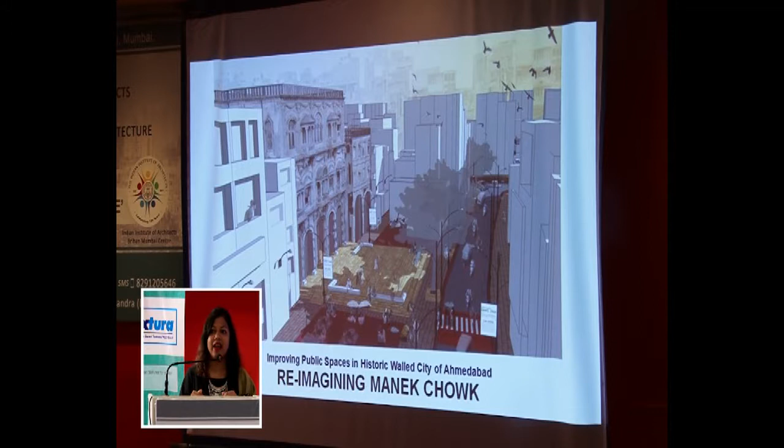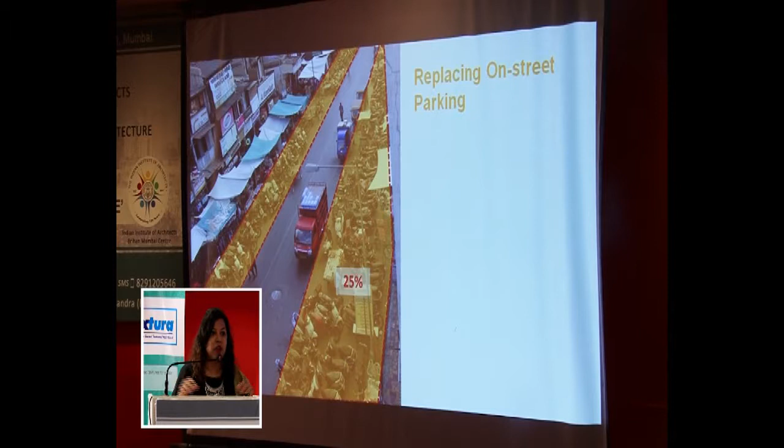For example, this is a typical street in the old city of Ahmedabad, where the biggest problem is parking. That takes away 25% of the land, which leaves absolutely no space for people to walk. So what happens? If you see all our guidelines and regulations, they are more towards parking. If there are more issues towards traffic, more congestion, what do we ask for? More roads and more parking. So what does parking do? It attracts more cars.

My entire issue was that we as citizens fail in asking things from the government. Government is always there to give what we want - we have elected them, they are our elected representatives, right? So the biggest problem lies in what we ask.

As an urban designer, what we did is we marked exactly how the space is being used. If you see, the car, for a driver, there was only 35% of the space for driving. And for the people, it was actually less than 2% of the area.

If I ask any of you, the major problem we face in Bombay is traffic, right? And what do we ask for if there is traffic? More flyovers. But let me make you understand - like tomorrow, most of us are fighting fatness, obesity. To solve obesity, do we solve it by wearing loose pants? As you grow, as you buy more loose pants, does it cure obesity? No, right?

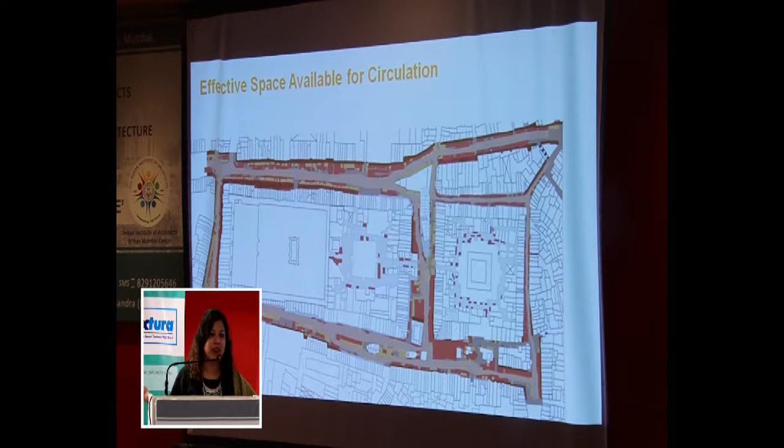Same thing - for more cars, we ask for more flyovers and we widen the roads. What does it do? It eats away the footpaths. So then where do those pedestrians walk? They walk on the carriageway. It creates more conflicts, and that is what creates traffic. So who has asked for those big roads? Pedestrians. So the thing is, what are we asking?

Why can't pedestrians ask for footpaths? Why can't pedestrians ask for better public transport? One of the most interesting numbers to give you - in Bombay right now, the two big projects we are talking about are the Trans-Harbour Link and the coastal roads. We are asking for better roads, better vehicular infrastructure, but do you know what percentage of vehicle owners are in Bombay? Any guesses? 50, 20, 45, 60?

The answer is only 8%. And do you know what percentage of pedestrians are in Bombay? We all are pedestrians because we all have to walk at least to our car. But have we all 100% come down and asked government for better footpaths? Our code states 1.8 meters as the minimum footpath.

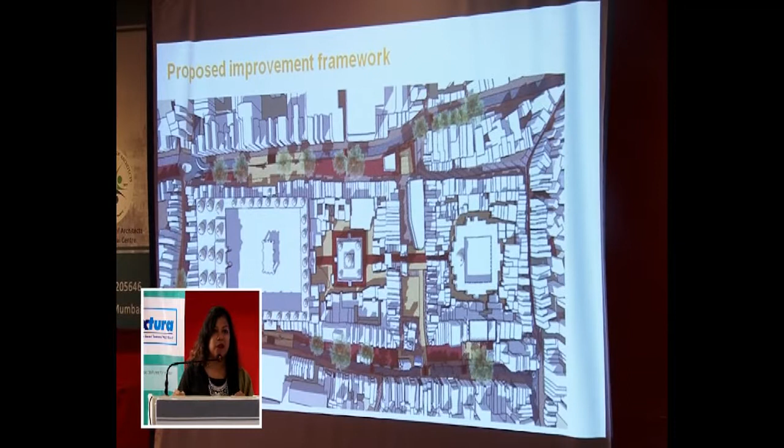For example, just to give an idea, you know how roads are widened? There is a PCU unit given to a car. Once you see the peak hour traffic, you divide it, you do certain arithmetic, and you come down to the width required - that's how the width is provided. Such things are not mandatory for a footpath. If that thing is done for a footpath, a vehicle can actually pass very smoothly on a carriageway by reducing the conflict areas. No one does that. That's how the entire design actually worked.

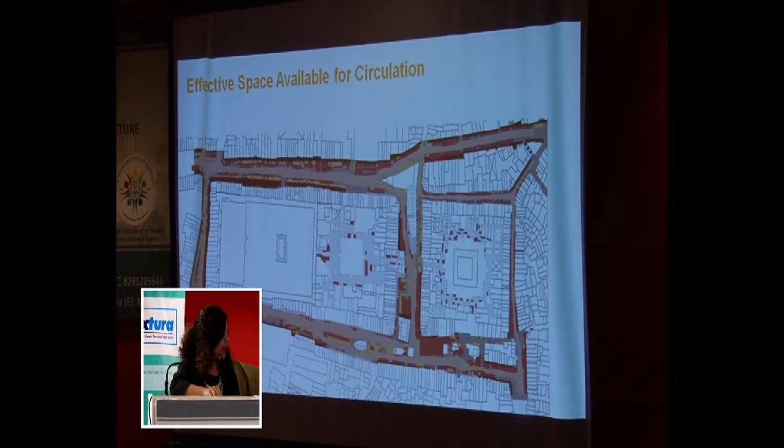So if you see, right now there is absolutely no pedestrian area, and the hatch in between is not working. It's okay, but you can figure out the hatch, right? So that's the only carriageway.

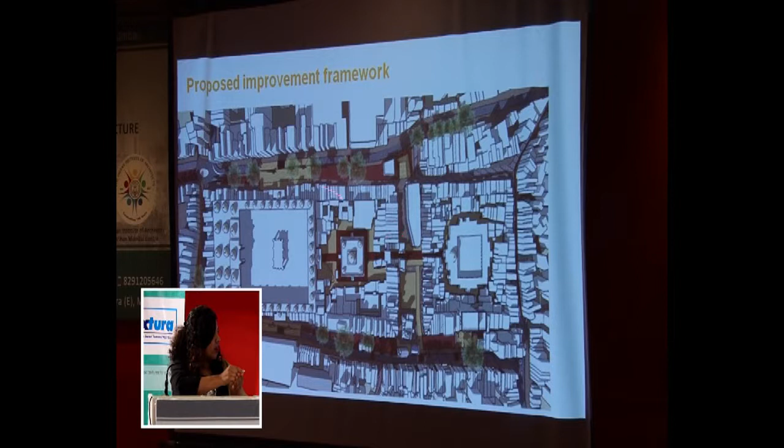Here, if you see that maroon part, we have only taken away the parking and reorganized the spaces for the vendors and pedestrians. So what happens? The conflict area decreases, therefore reducing congestion, and vehicles and pedestrians both coexist happily.

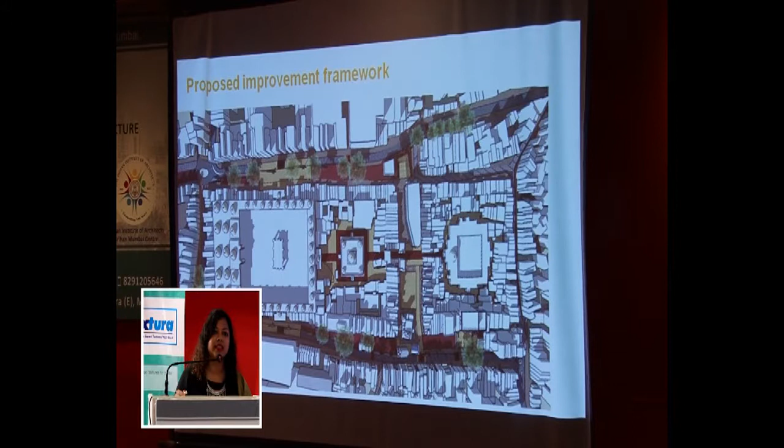We are saying, as Sulakshana ma'am was talking about, Gehl. Jan Gehl is one of the biggest proponents of saying a government is not supposed to provide you with parking.

When we as people buy an AC, do we ask for free electricity? No. So then if you buy a car, who has given you the right to ask for free parking? That's a luxury that the government is giving you at ₹5 per hour. So that doesn't strike, right?

So we have found derelict plots in the abutting zones that provide off-street parking for these vehicles, and also disincentivize parking norms in this area, to promote more pedestrians.

One thing we come across in designing these areas is this mentality of going by car, buying something, and going away. When we had the stakeholder conversations, the owners said, why will people come if there are no cars? So there would be a certain conflict for some months, maybe a year or two.

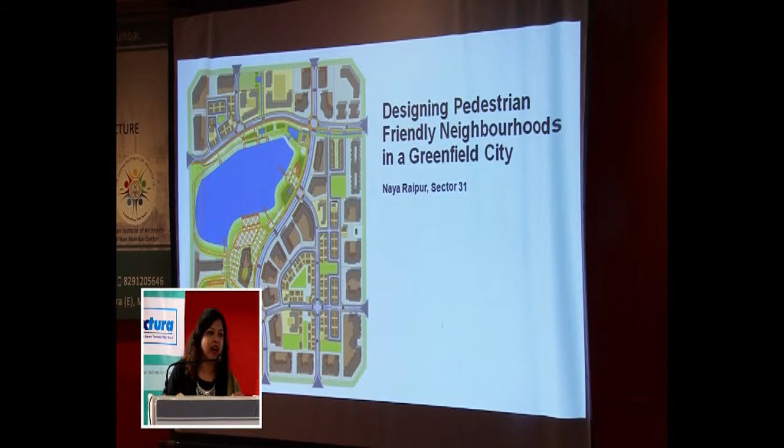The second project that I'll be showing you will be in a Greenfield area called Naya Raipur, the new capital of Chhattisgarh.

As you see, this is how I started my major work, working as an urban designer. This city looks like Mars. There is nothing around. This picture was taken in rainy season where you see some green, otherwise it's completely red.

Just a personal note - being a woman, when I joined WRI I was just 26. I don't know whether I'm happy or sad, but I'm the only person in my entire organization at a national level that they send to different cities every year to convince people. It's not a guy, there are no seniors, only me. There are men and women alike who like to stay in their own cities and work, and I understand that. But for me, they have always sent me elsewhere - anyone who knows me knows that this year I'm in Bombay, last year I was in Delhi, before that Ahmedabad, before that Chhattisgarh. So every year it's a new address for me.

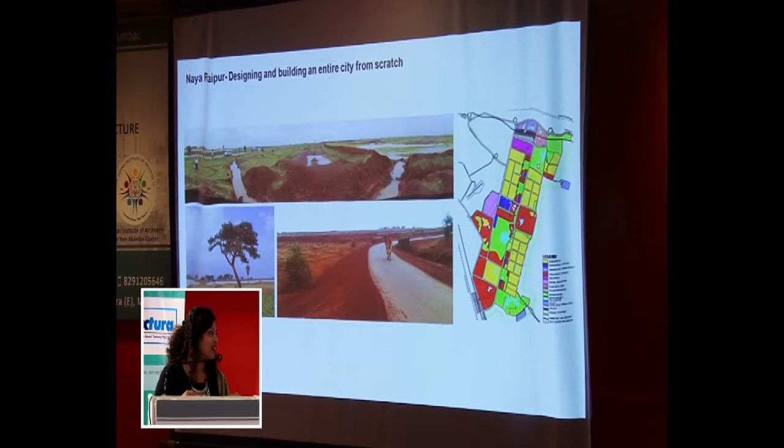It was something so weird - in a government office, everyone used to talk in Bhojpuri, and I was like, stop. It was very difficult for me to control my laughter because being from Bombay, our Hindi is horrible, and with that it was Bhojpuri Hindi. All the documents were in Bhojpuri Hindi and I had to understand them and then work. So it was a weird gamut for me to work in. That's how this project started.

Going ahead, with the same designs we said, these are the designs done by you, so let's build it. My job was to take those papers and convince every person. So something like I would go to a housing board and say, listen, we want safe cities, right?

Did you know the Nirbhaya incident could have been avoided if we had mixed uses at the edges? No one thinks about it, right? So we ourselves are to blame for such incidents. To help build a safe city, we instead design gated cities. Why? These are the gaps we are lacking - we know the concerns but don't know how to address them. Sometimes we know how to address them, but we take a step back saying, let me not make that compromise, let someone else make it. That's where the entire issue happens.

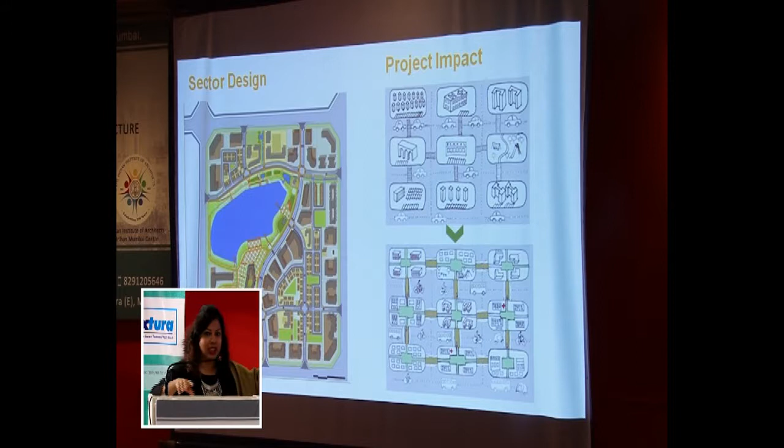So my 3 years were spent explaining that you can actually design one building with 3 different entrances, so people don't have to interact, but at least when they come down they all get the benefit of staying next to the lake and a high street. As an architect, we can find creative ways of helping different income groups and genders come together and stay. This project was about making people understand the scales of green spaces and how people can stay together.

One interesting thing while working with Naya Raipur, since it was my second government agency after MIDC and MMRDA, I was always told government agencies are corrupt, people don't listen, and you are a woman, 26 years old, what are you going to do? So when I entered on day one, they actually thought I was an intern, a trainee sent by an NGO, probably very poor, hiring trainees to get their work done. That's how I entered.

When I was talking about TOD, they were like, 'beti ye kya kar rahe ho, matlab rakho idhar.' At that level, I entered NRDA in January 2012, and when I left in May 2013, I was called Neha Madam, asked to see all 7 other sectors along with my own, and help the entire city become TOD. We designed only 31, but these other sectors also became TOD, and now the TOD concept will be held in all other sectors. That's the entire training that happened.

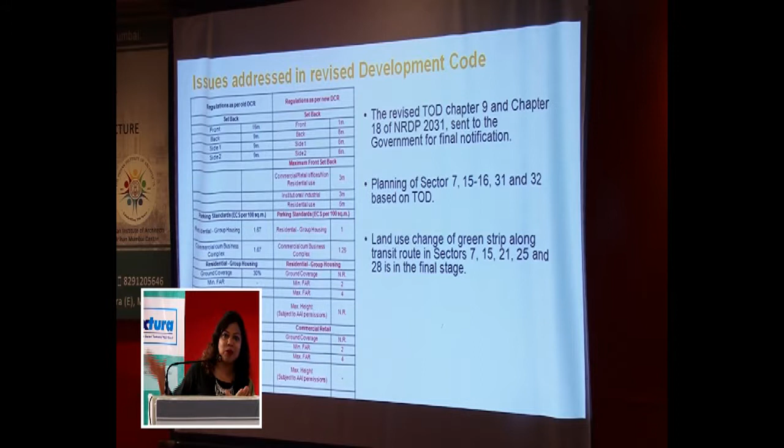Through this, going to a place with Bhojpuri speaking officers aged 47 to 87, telling them, listen, you are right, but do this as well - that's how Naya Raipur happened.

One interesting thing I am also engaged in right now at my company is designing games for stakeholder consultations. For example, if your cooperative society wants to design a cycling track or do a neighborhood improvement plan, what's the first thing that happens? We don't even have 50% agreement on it. We're not even talking to our neighbors, let alone getting the entire locality to agree on one simple thing.

So we designed a board game - an architect coming and designing a board game, what does it look like at the core? If you want a park, street lights, or anything, we've jotted down everything anyone wants in a neighborhood plan design. We put it in phases, what takes long term, what is short term, and there are expenses - street lights may be expensive, flower plants could be cheaper, things like that.

Then we ask people to come together, sit at a table, and prioritize. You've got this much funding, this much time, tell us what you'll do. This enables them to understand that our demands are actually not that real, and can be negotiated if we plan well. So what we're doing is making people talk, understand, and prioritize their work.